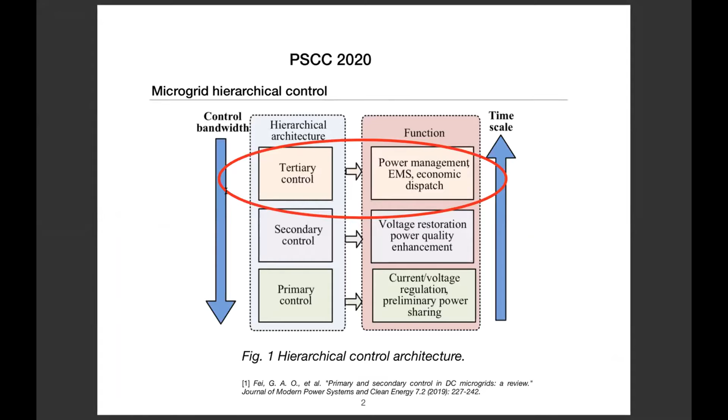More specifically, a two-layer approach is considered to address this task. It consists in a schedule and a dispatch layers. The schedule layer computes on a quarterly basis an economical operation scheme for the 24 hours ahead with a 15-minute resolution. The dispatch layer computes the set point in real time based on the scheme and the microgrid status. Now, the key question is how the schedule and dispatch layers interact. This topic has been intensively studied in the literature.

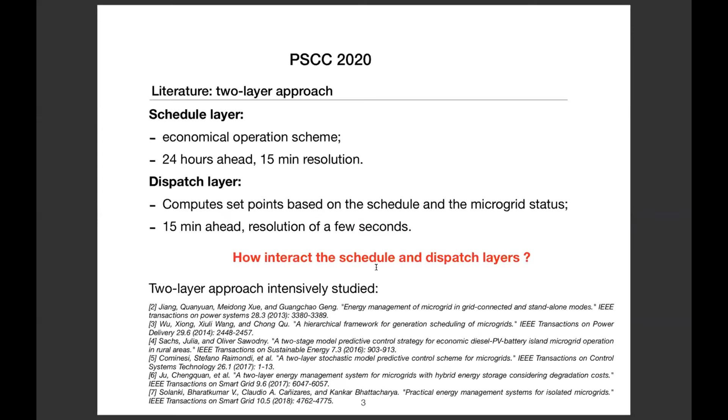So first we'll go with the problem formulation. So the problem formulation can be defined for a given microgrid design and configuration as operating a microgrid safely and in an economically efficient manner by harvesting as much renewable energy as possible, operating the grid efficiently, optimizing the service to the demand side, and optimizing other side goals.

So we made a few assumptions in this paper. First, the controller optimizes economical criteria, which are only related to active power. Secondly, fast load frequency control, islanding management, as well as reactive power control are not in the scope of the study. Thirdly, the battery aging is not taken into account and is supposed to behave ideally with charging and discharging efficiencies. Finally, the microgrid is a price taker in the energy and reserve markets.

So here you can see the abstract formulation of the microgrid control that is provided by equation 1. A_t is a set of actions at any time t over the lifetime of the microgrid. The action should be taken as frequently as possible to cope with the economical impact of the variability of the demand and generation side, but not too often to let transients vanish. Typically, a few seconds is fine. Delta t is the time delta between actions and is not necessarily constant.

And some of the actions are purely market related. They are denoted with A superscript M, while other actions are communicated as set points to the devices of the microgrid, A superscript D. The state S of the microgrid is also made of two parts. S superscript D represents the state of the devices, such as the state of charge of the storage system, for instance, or the state of a flexible load, while S superscript M gathers information related to the current market position, such as, for instance, the nominated net position of the microgrid over the next market periods.

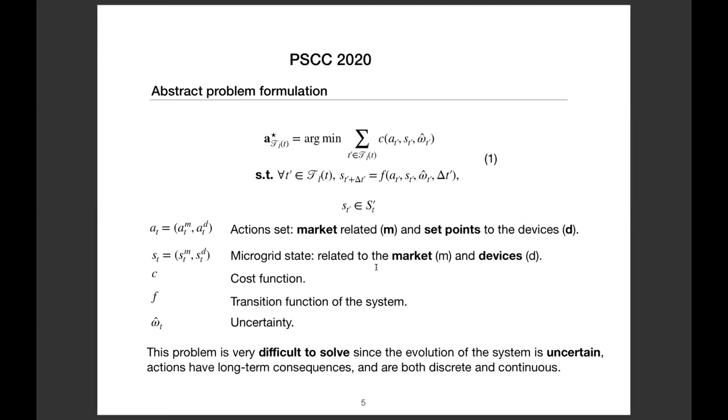So now let's switch to the proposed method. As forecasts are valid only for the relatively near future and optimizing over a long time horizon would anyway be incompatible with real-time operation, this problem is approximated by cropping the look-ahead horizon to 24 hours. However, market decisions must be refreshed much less frequently than set points.

We thus propose to decompose the problem in an operational planning problem that computes every 15 minutes market decisions and the value function for the 24 hours ahead, and a real-time problem that computes every few seconds set points based on the value function and the microgrid status. The real-time optimizer computes only set points within the current market period. So we consider only one period for the real-time problem. Figure 2 illustrates this process. This value function propagates the information from the operational planner to the real-time controller.

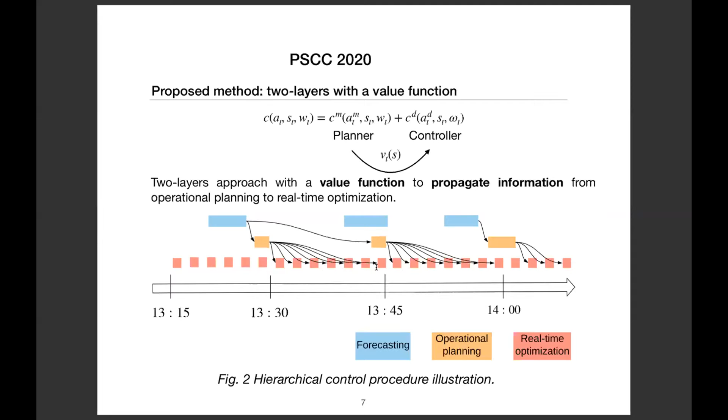Therefore, equation 1 is decomposed into equations 2 and 3. And the value function represents the optimized value of 2 as a function of the state of charge of the problem. And if we make the assumption that equation 2 is modeled as a linear program, this value function is thus convex and piecewise linear.

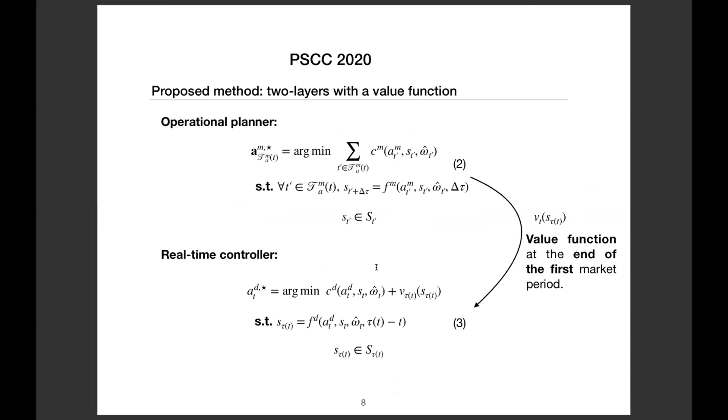The objective of the operational planner is composed of immediate and delayed costs. The immediate costs take into account different revenues and costs related to energy flows: the cost of shed demand, steerable and non-steerable generation, the revenue from selling energy to the grid, the cost of purchasing energy from the grid, and the cost for using the storage.

The delayed costs are composed of the peak cost and symmetric reserve revenue. Delta P is the peak difference between the previous maximum historic peak and the current peak within the market period. The symmetric reserve is provided to the grid within the current market period.

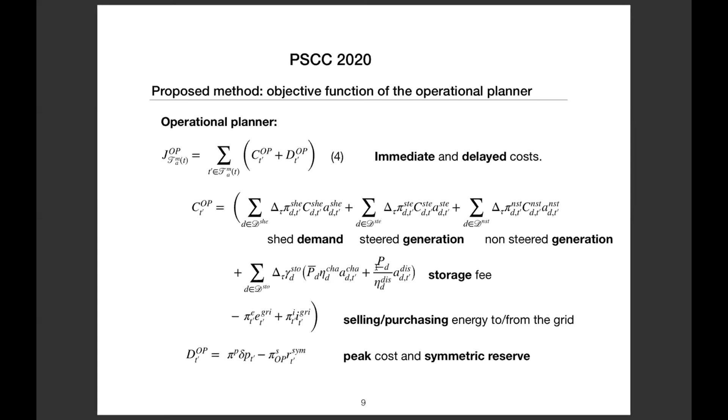The objective function of the real-time controller is composed also of immediate and delay cost and the value function. The real-time optimizer immediate cost are the same as the operational planner immediate cost by replacing time index and replacing delta tau by delta t and considering only one period of time. The real-time optimizer delay cost is composed of the peak cost and symmetric reserve penalty cost.

Every evaluation of the objective of the planner with a fixed state of charge at the end of the first market period provides us a supporting inequality by taking the dual variable that is called mu. Thus, the value function is approximated by a set of cuts or inequalities. It is like a parametrization of the right-hand side of the objective of the planner, in fact. So by this way, we can approximate the value function.

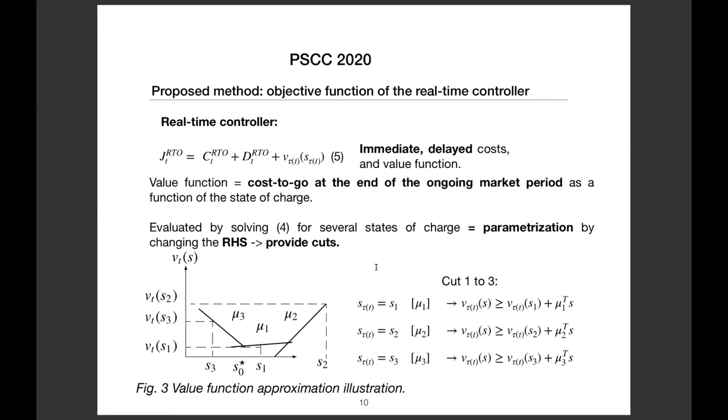Okay, let's consider now the case study. The PV and consumption data have a 1 second resolution, meaning that the real-time controller could compute its optimization problem each 5 to 10 seconds in operational mode. And thus, we consider the case study of the MIRIS microgrid. It is located at the John Cockerill Group's international headquarters in Belgium. It is composed of PV, several energy storage devices, and a non-sheddable load.

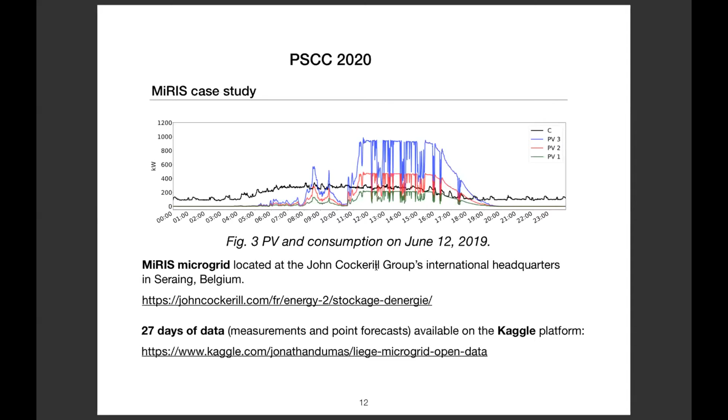The case study consists in comparing the two-layer approach, named RTO-OP, to a rule-based controller for three configurations of the installed PV capacity, as shown by Table 1, where the PV installed capacity increases from 400 kilowatt to 1,750. All the other parameters are identical for the three configurations. The selling price is constant, 35 euro per megawatt hour, and the purchasing price is composed of constant day and night prices, 200 and 120 euro per megawatt hour.

The peak mechanism is taken into account with a constant peak price that is set to 40 euro per kilowatt and an initial maximum historic peak of 150 kilowatts. Storage systems are initially fully charged and the battery capacity is set to 1,350 kilowatt.

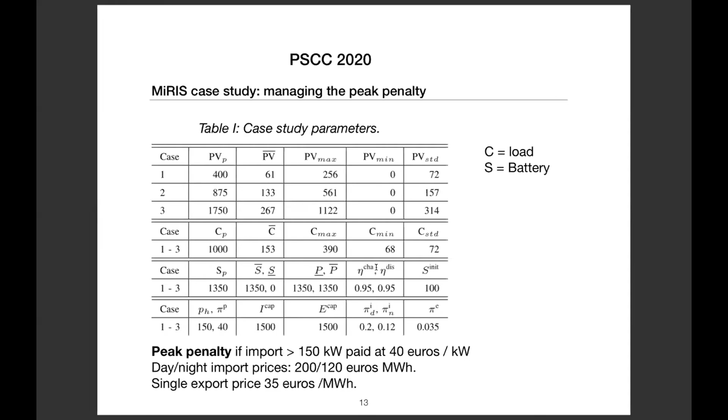The operational planner computes the planning based on PV and consumption 24 hours ahead, based on 24-hour ahead forecast. The computation time of the real-time controller on a regular computer is around a few seconds, and the operational planner around 20 seconds. So in total, the simulation computation time is up to a few hours when considering the entire dataset.

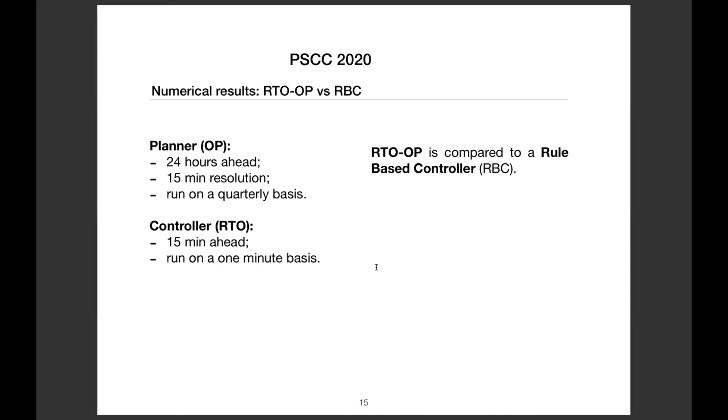The weather-based forecast methodology consists in two classic deterministic techniques: a recurrent neural network that is implemented with the Keras Python library, and a gradient boosting regression that is implemented with the scikit-learn Python library. This model uses as input the weather forecast provided by the Laboratory of Climatology at the University of Liège. To estimate the impact of the PV and consumption forecast error on the controller, the simulation is performed with the planner having access to the PV and consumption future values.

So here we have the result by considering the peak management without symmetric reserve. The peak cost strongly penalizes the benefits as it applies on all the year ahead once it has been reached. When the planner uses perfect forecast, it provides the minimal peak cost, whereas the rule-based controller provides the minimal energy cost on all the cases. However, the perfect planner achieves the minimal total cost composed of the energy and peak cost. That is expected because it is an oracle, it knows perfectly the future.

The simulation illustrates the impact of the forecast on the RTO-OP behavior. The RNN forecaster provides the best result, but is still a long way from managing the peak as the oracle due to the forecasting error. These cases show that the RTO-OP controller optimizes PV storage usage and thus requires less installed PV capacity for a given demand level. This result was expected as the peak management is not achieved by the rule-based controller and becomes critical when the PV production is smaller than the consumption.

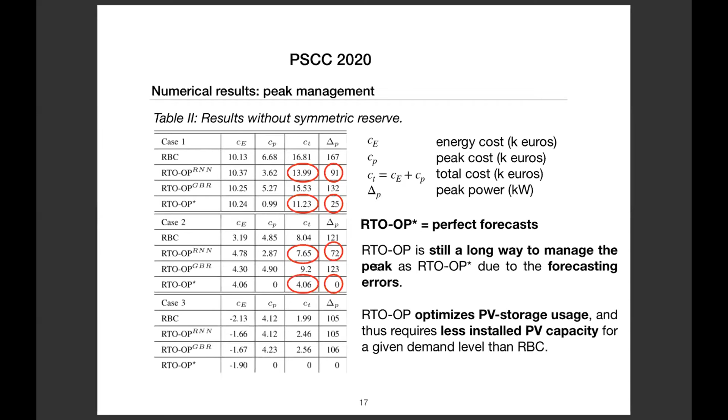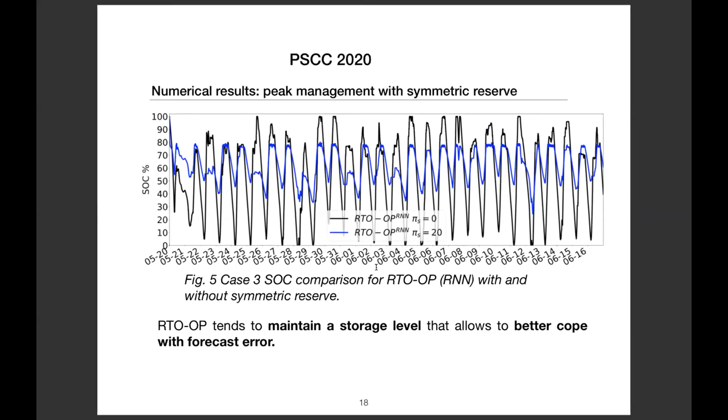Now let's consider the numerical result when we set the symmetric reserve. So here, the price of the symmetric reserve is set to 20 euro per kilowatt. And as you can see, the RTO-OP tends to maintain a storage level that allows it to better cope with a forecast error, as we will see on the next slide. So here we only consider the RTO-OP with the RNN forecaster, and you can compare the results with and without symmetric reserve. The peak power has decreased on all cases.

However, this behavior tends to increase the energy cost if the PV production is important in comparison with the consumption, such as for case 3. Indeed, the controller will tend to store more energy into the battery instead of exporting. That is why there is an economic trade-off to manage the peak and the reserve simultaneously, depending on the valorization or not on the market of the symmetric reserve.

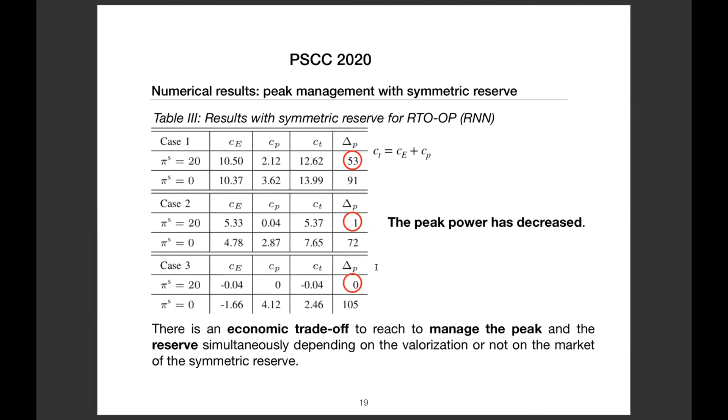The reserve can also be valorized internally to cope with unknown or difficult to forecast events, such as a sudden drop of the export or import limits due to loss of equipment or grid congestion. So this case study was just to illustrate the two-layer approach, but it could be used for other kinds of application.

So we have seen that the value function computed by the operational planner based on PV and consumption forecasts allows to cope with the forecasting uncertainties. The real-time controller solves an entire optimization problem, including the future information propagated by the value function.

This approach has been tested on the MiRIS microgrid case study with PV and consumption data monitored on site. The results demonstrate the efficiency of this method to manage the peak consumption in comparison with the rule-based controller. This test case is completely reproducible as all the data used are open, PV, consumption monitored, and forecast, including the weather forecast that are available on the Kaggle platform.

The proposed approach can be extended in several ways. First, the deterministic formulation of the operational planning problem could be extended to a stochastic formulation or robust formulation in order to cope with probabilistic forecasts. Secondly, the balancing market mechanism could be introduced. Finally, the approach could be extended to a community by considering several entities inside the microgrid. And then we could introduce kind of green KPI, key performance indicator, to try to meet the challenges of the IPCC report.